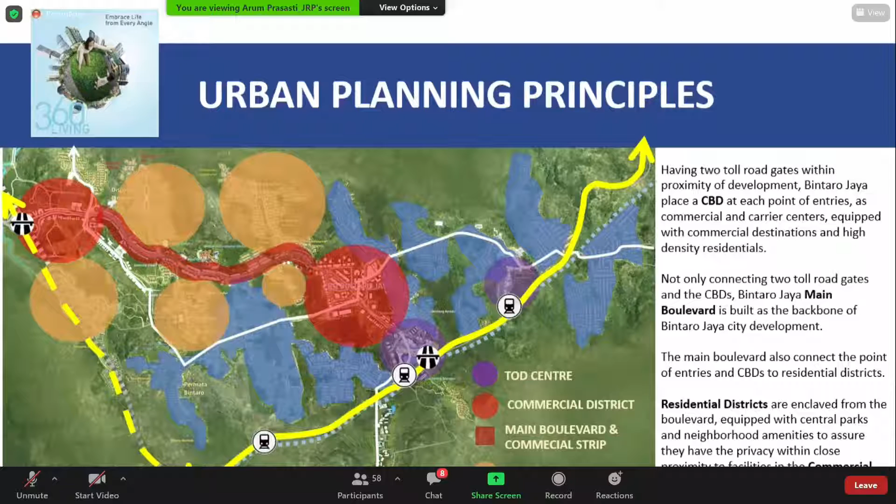The second pillar is the mobility network. How do our residents reach their office in a convenient and relatively cheap way? From their home, we built the pedestrian walk and bike and scooter lane along the boulevard. We also provide an inner shuttle bus, which we name Intrans Bintaro Jaya shuttle bus.

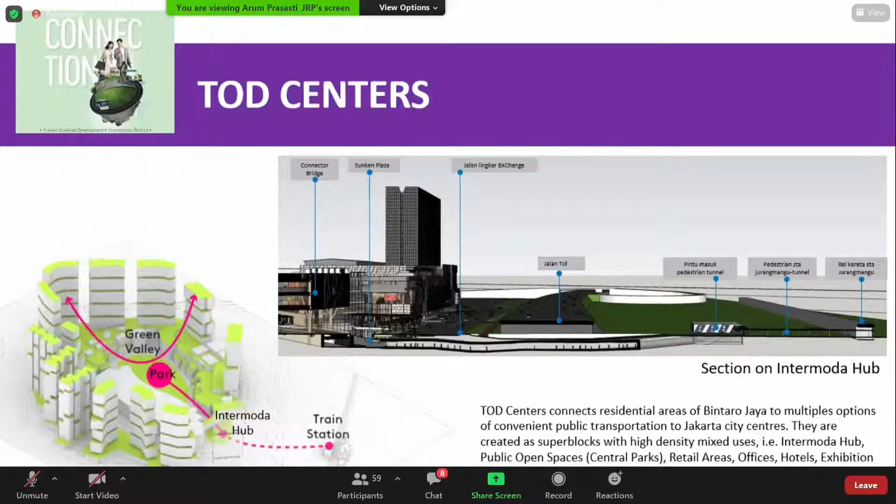And this is the commercial strip along the boulevard. As you can see, the commercial type building is smaller and more varied, like office parks or shop houses, standalone retail centers, service apartments, fresh markets for daily needs, food areas, and it's reachable within walking or bike distance from your home.

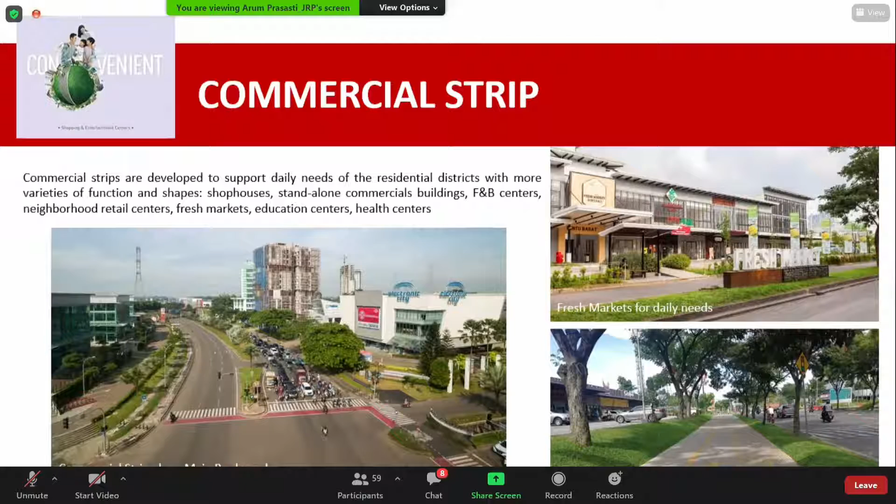And this is how we develop our residential district. We built residential districts on land of 30 to 40 hectares, only reachable by one entry point from the boulevard, to make sure of the privacy of the residents.

And then we built Central Park in the center, around 2 hectares, with a retention pond for flood control, and then the boulevard around the Central Park, as you can see, is highly tree shaded. And then we built the residential clusters around the Central Park, about 100 to 200 houses each.

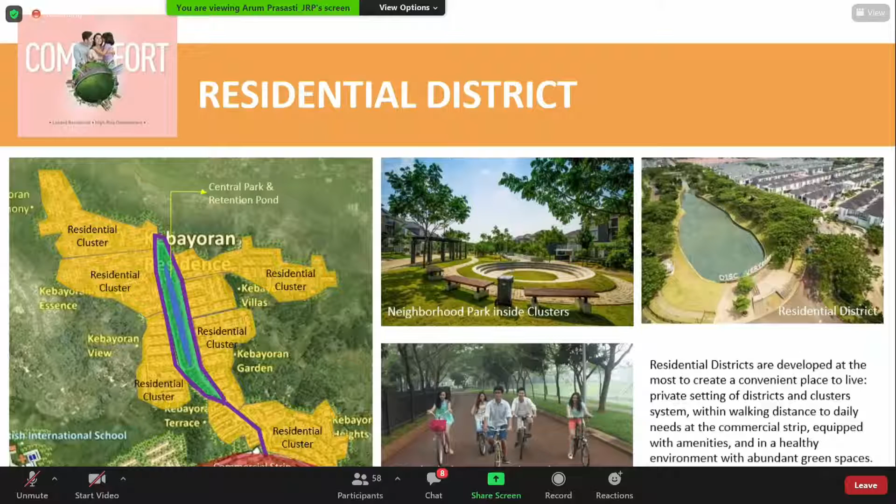And this is the most important, and also the one that we're most proud of in Bintaro Jaya: our community. Starting from 2009, we created a community called Eco Community, Beyond Green for a Better Living. A green lifestyle is created not only by the physical environment, but also the social environment. So we promote and educate our residents to more actively participate in health and environment sustainability initiatives, supported by our estate management.

So what we do in our community: first is the active participation of our residents. We educate them and make sure they have enthusiasm to actively participate. So we create an annual competition between each cluster or neighborhood, giving awards to which neighborhood has the most green initiatives. This promotes a lot of enthusiasm in our residents, and we've been giving this competition award for many years, more than 10 years. We're quite proud of it.

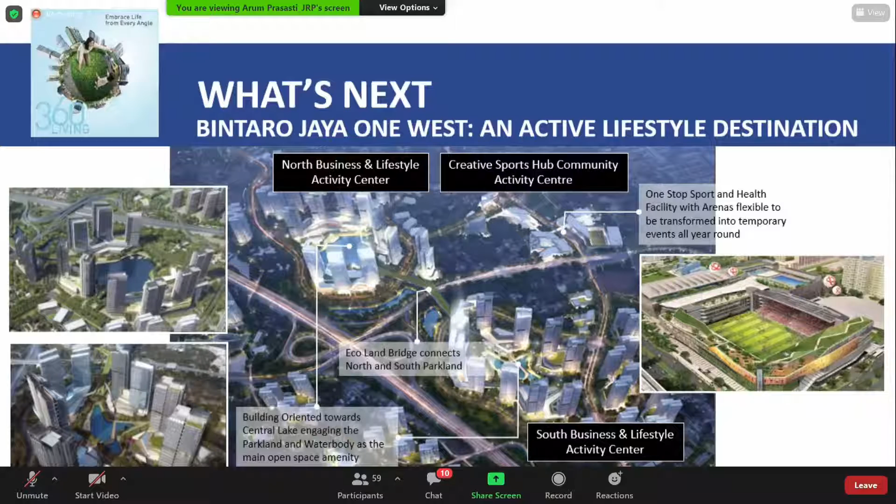I invite you all to visit Bintaro Jaya and see for yourself.

Thank you. Thank you, Ibu Isa. I hope I'm still within my timeline. Oh, it is very much. I was just going to remind you that you have 5 minutes remaining, but thank you very much. It was really interesting to understand what Bintaro Jaya stands for, especially the efforts in maintaining sustainability within its community.

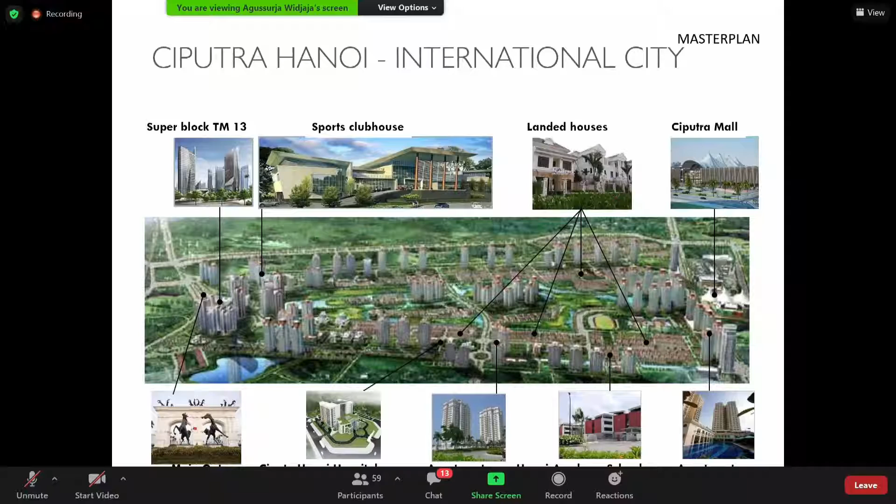The status of the project at present: in total, we have already built more than 1,000 landed houses and more than 27 towers of apartments. The total population is about 24,000, with the Vietnamese local people around 75%, and foreigners living in our project about 25%.

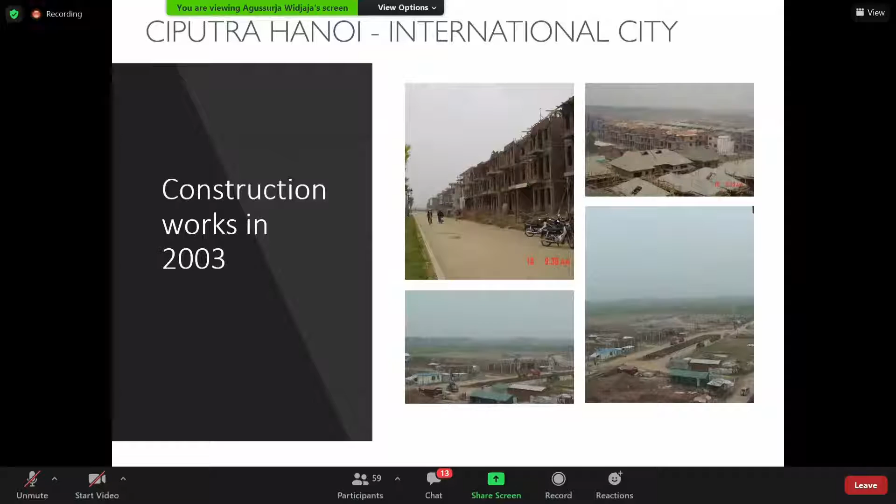This is just the plan. We started the project construction in 2002. This is the land condition in 1995, mostly empty farmland. And this is the construction progress in 2003, as we start construction of apartments and landed houses.

This is the gate of the Ciputra Hanoi International City and the apartment. The landed houses, this is the most prestigious and more expensive landed houses in our project in Hanoi. The cost of one landed house like this, with a land area of 450 square meters, is around 2 to 3 million US dollars.

This is the aerial photo of the Ciputra Hanoi landed houses area. This is the apartment. The landscape inside the project and the green area inside the project. We have 3 schools: United Nations International School, Singapore International School, and Hanoi Academy inside the project. We have sports facilities, including the fitness center, the indoor swimming pool, and the driving range. And we also have estate management services, 24 hours, 7 days. This is the aerial picture at night of Ciputra Hanoi.

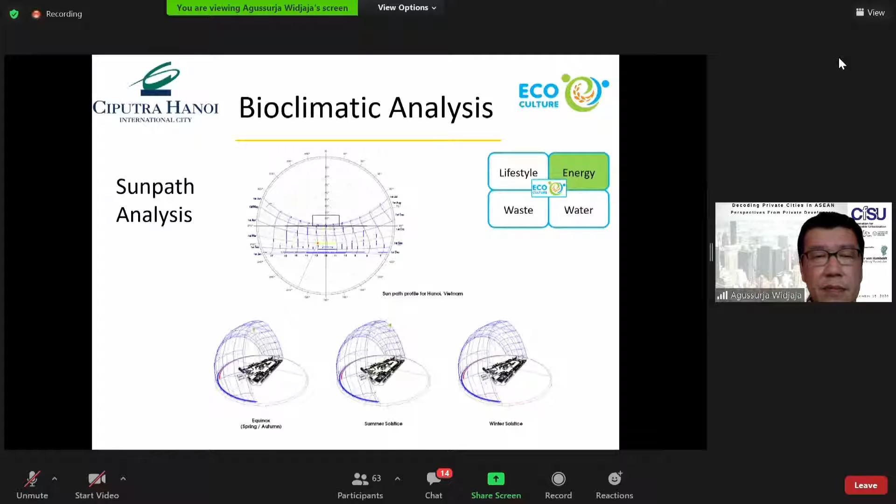Regarding the bioclimatic analysis, our master plan was originally based on sun path analysis. We focus on designing clusters that maximize the availability of sunlight and reduce general heating or cooling. We think this will save much energy for air conditioning and lighting, while at the same time increasing the overall comfort for our residents. We also look at the orientation of the building carefully, the facing of the building, to align the shadow with the function and the functionality of the site or building.

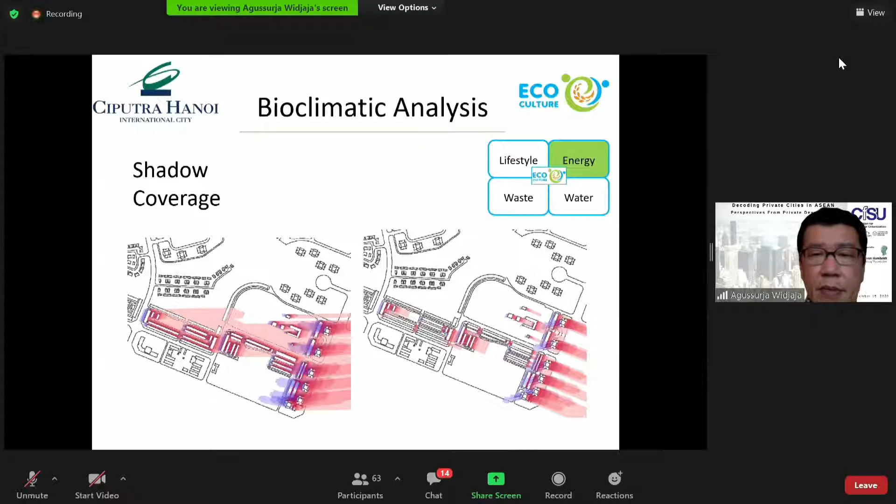The wind direction is also part of the bioclimatic analysis. This is to ensure that we are encouraging good circulation of air going through the streets and between our buildings.

This is the eco-path that we are building. And we also have solar panels for the street lights. We have installed solar panels throughout the estate to power our street lights. Dual waste bins are also introduced in our estate so that residents can participate in maximizing our reuse and recycling efforts.

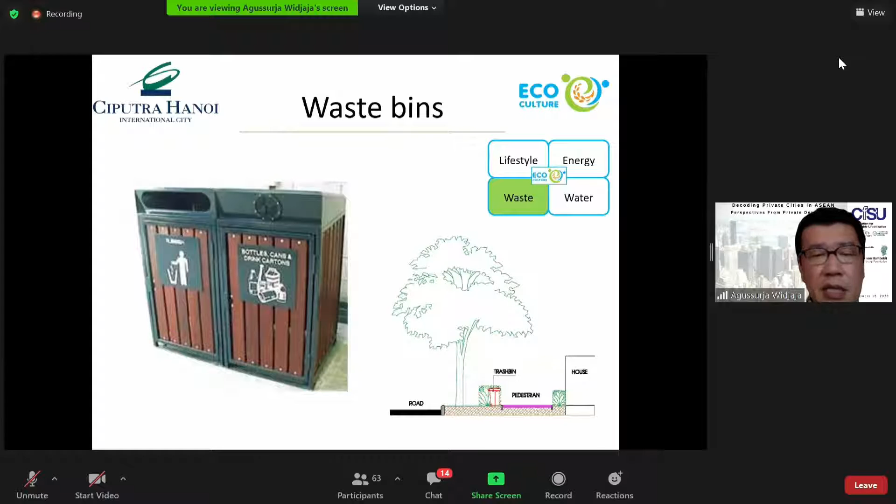We have a large area dedicated for landscaping in Ciputra Hanoi. Therefore, we have a substantial amount of green waste that we process into natural compost, which we use to fertilize our landscape, allowing a full green waste recycling process.

This is the eco-culture community campaign. We are using billboards we installed inside the project. This is another billboard campaign to save water. And this is another billboard community campaign to encourage the lifestyle of recycling waste to reduce pollution.

Besides Hanoi, on this opportunity I would also like to share our experience for our project in Phnom Penh, Cambodia. The total project area is 260 hectares. We focus on high quality residential property, and the project is expected to have 18,000 people.

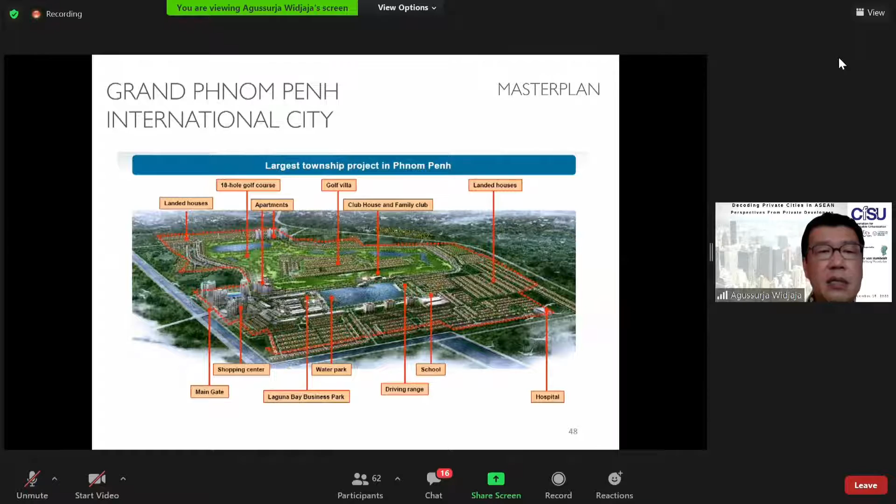This is the gate of the project, similar to our Hanoi gate. This is the master plan of the project. In the middle, we have a golf course surrounded by the residential area. And near the main road, we are building the commercial area.

And this is the golf course - the golf villa, the houses facing the golf course. We also built the water park in our project in Phnom Penh as a recreation facility.

Okay, I think this is the end of my presentation.

Thank you very much, Mr. Agussurja, for that very interesting and illuminating presentation on how private developers operate in countries other than Indonesia, which we had not previously been aware of. We have a few questions already, so let's go to them now. A frequently asked question from several participants is how private developments can align with government developmental plans and programs. What is the relationship between private developers and the government, and how do you negotiate the operational details and services you can or cannot deliver? This is a question for both of you. Bu Arum, maybe you can start, and Pak Agussurja can add his answer a bit later.